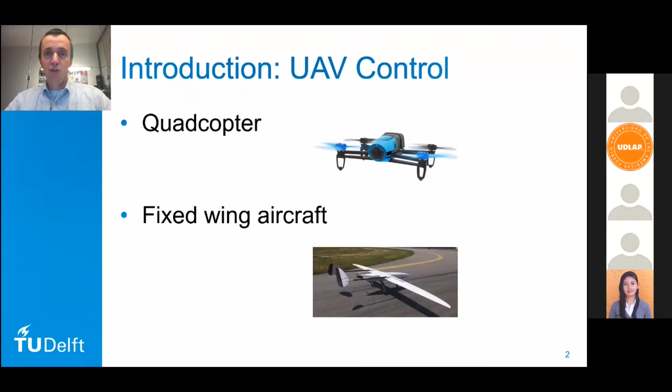For a long time, the research on flight control of UAV was focused on quadcopters because they are simple, cheap, and versatile. They have only 4 moving parts and therefore are a great study object. And fixed-wing aircraft because they have a very good endurance. They have a very good lift-to-drag ratio, can stay in the air with little energy and thereby achieve very long ranges and very high speeds.

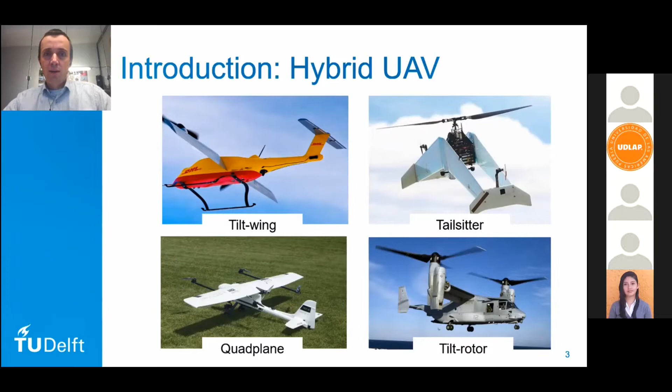But recently, in the last decade, a lot of attention was given to so-called hybrid UAV. One of those hybrid aircraft is the NederDrone. The NederDrone was developed in Delft to be a versatile vertical takeoff and long endurance hydrogen-powered aircraft. The fuselage is shaped around a pressure cylinder with hydrogen, and in the back we have a fuel cell. It has very high aspect ratio wings for minimal drag and long endurance. And thanks to its 12 motors spread over the long wing, we have hover capabilities.

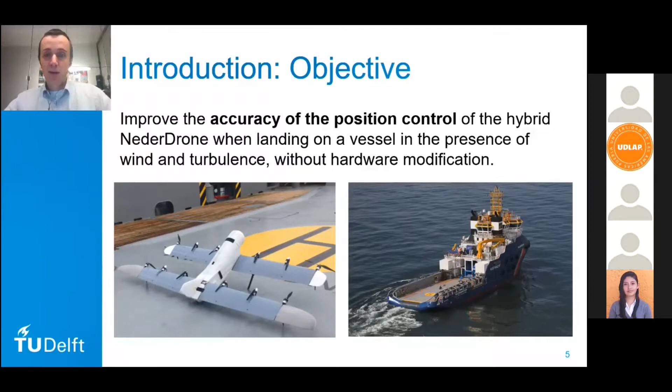So the objective of this study is to improve the accuracy of the position control of the hybrid NederDrone for the mission of landing on, for instance, a moving vessel. And that moving vessel is typically surrounded with wind and turbulence. And one of the objectives of this study is to not need hardware modifications. It then includes running a controller on board the same autopilot with the same microcontroller, which excludes some of the most advanced control theories. The NederDrone is now flying with incremental nonlinear dynamic inversion control.

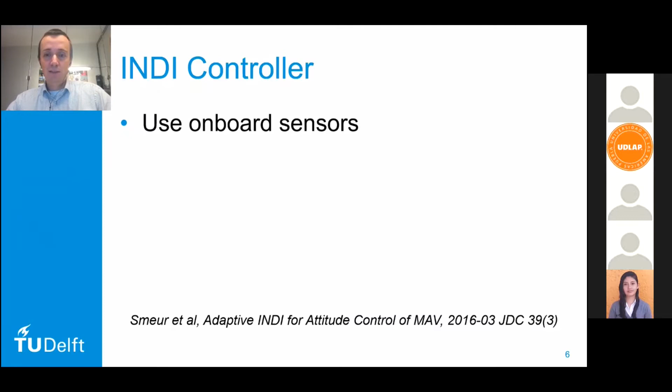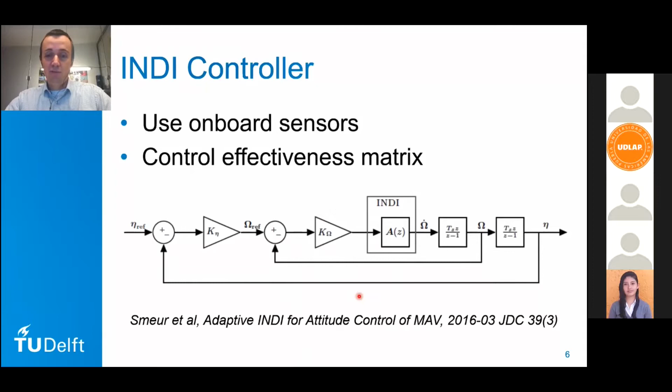The nice property of this type of control is it is sensor-based. You only need a good model of the controls, so a good estimation of the control effectiveness matrix, but you don't need a very accurate aerodynamic model of the whole platform, as the sensors, the accelerometers, are actually measuring the external forces on the platform. The implementation includes a linear model to create reference signals before it enters the INDI control. And the work presented in this paper is about how to create effective reference signals for hybrid UAV.

This feedback system can be done either in Euler angles. It can be done in quaternions. The quaternion is basically one rotation in between 2 coordinate systems, and it's mathematically the shortest rotation. Very interesting. But recently another suggestion came up, which is tilt twist. This one splits the pitch and roll from the yaw, as in most helicopters the thrust vectoring principle is used for position control, and that has a higher priority than setting the yaw.

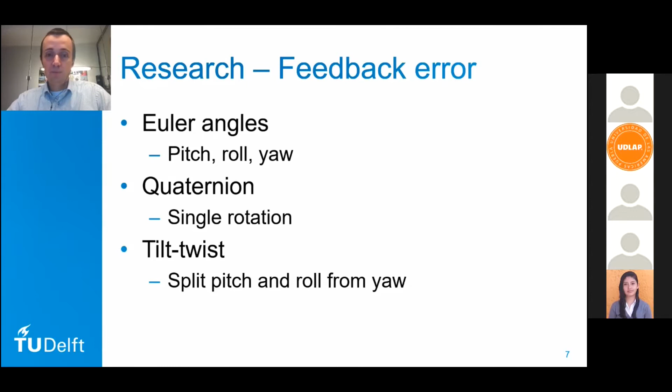If not all three rotations can be executed at the same speed or rate with the same response time, then quaternion control runs into trouble, because the quaternion describes one rotation around one axis, but if the platform can rotate faster around one axis than another, then it doesn't do what you expect, and you end up with perturbations.

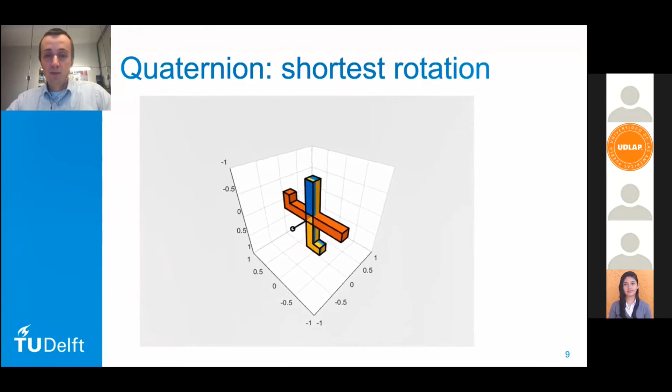In the case of the NederDrone, which has very long wings, the roll is much more controllable than the pitch, which has a much shorter arm, and the yaw, because of the damping of the wings, is by far the hardest to control.

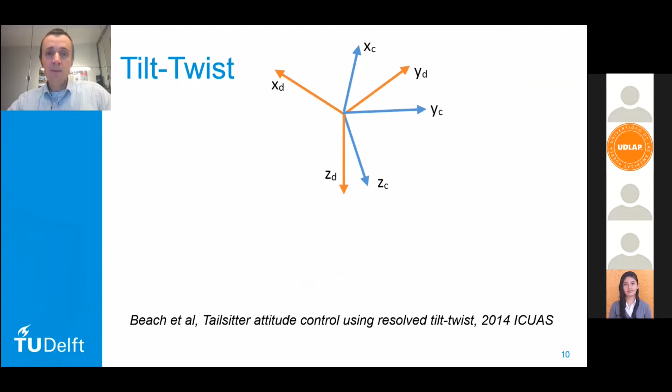Tilt twist starts by finding the shortest rotation to get from the current tilt vector, typically corresponding to the thrust vector, to the desired thrust vector, thereby effectively maximizing the response for the outer loop position control in helicopters. Once the tilt is corrected as quickly as possible, then we correct for twist.

This method has been successfully applied on quadrotors, where the tilt is also much faster than the yaw, or twist. Twist is done with torque of propellers and is always slower. The yaw is also less important for the position control.

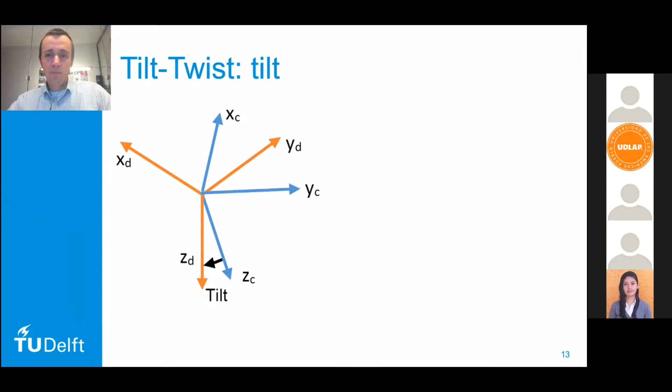How does tilt twist work? If we represent the current attitude with a rotation matrix RC and the desired attitude with a rotation matrix RD, then the matrix multiplication with the inverse yields the error between both. The last column represents a vector of which the arctangents of some elements are the tilt rotation in the X and Y plane.

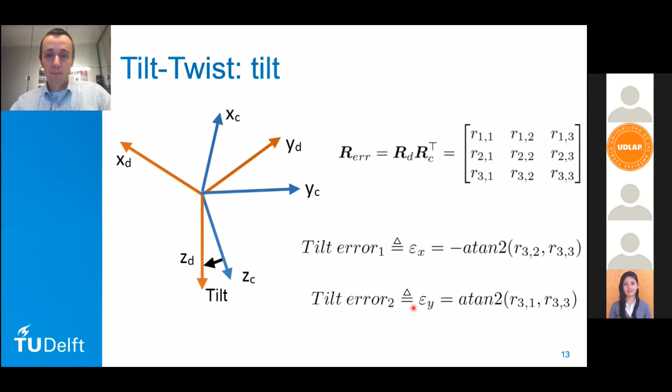For the twist, it's a bit more fiddly. We need to create an intermediate coordinate system called RP, which represents the attitude that the attitude will be after correcting for the tilt error. This is done using the Rodrigues rotation formula, RV, which describes the rotation of a vector along another vector.

And the twist error is then defined as the inverse cosine of the dot product between the two x-axes.

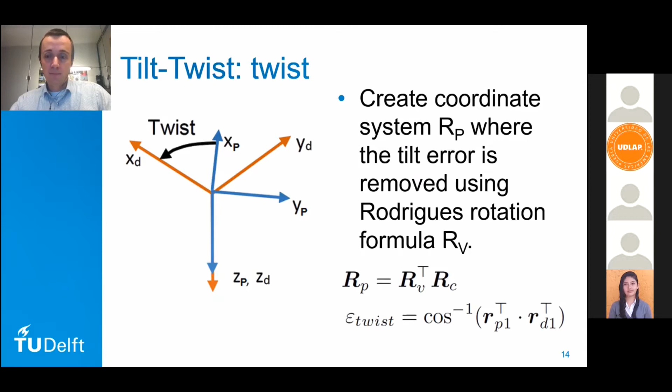What does the difference between quaternion control and tilt-twist control look like on a system with slow yaw dynamics? To investigate that, we created a Simulink model in which the yaw axis was made 10 times slower than the other axis. When you start with a large error, you can see that the pitch and roll angles, in the case of quaternion control, only start to go towards zero when the yaw angle is actually also zero.

For the tilt-twist control, on the other hand, the pitch and roll angles very quickly at 0.6 seconds have reached their set point. This means the tilt vector, or the thrust for a quadcopter, is pointing in the correct direction, and of course, this is used in the outer loop for the position control.

In other words, this simulation shows that with normal quaternion control, as long as your yaw angle is not reaching the desired value, then your pitch and roll are disturbed. And for some platforms, that's particularly important.

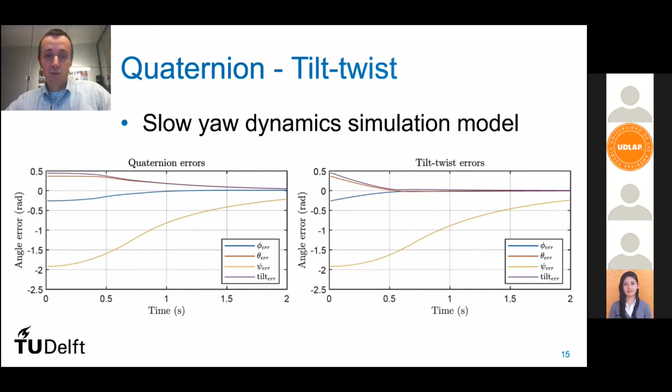For instance, in the NederDrone with very long wings, which can catch wind, this effect shows up very hard. But tilt twist was designed for quadcopters, or all platforms in which the lift vector corresponds with the tilt vector.

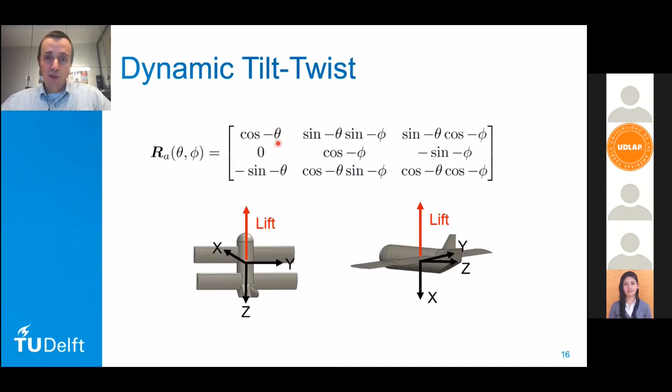To address this, dynamic tilt twist was introduced, which states that not the tilt axis should be performing the shortest rotation, but the lift axis. By introducing a rotation matrix with the transition angle, we can achieve that.

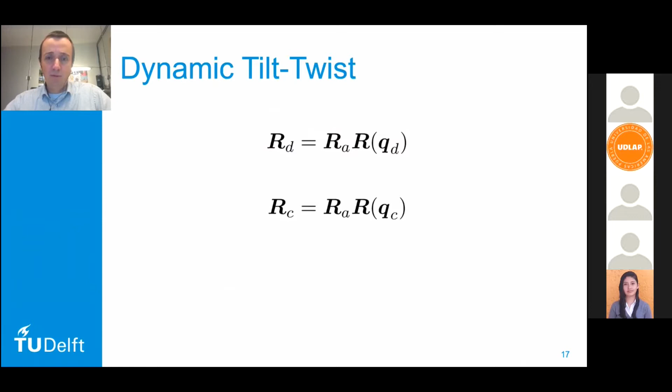The total formula for dynamic tilt twist comprises a simple correction for the transition angle before performing the same tilt twist algorithm as shown before. And the feedback error then needs to be reconverted after having had its lower gain, so that there's time separation between tilt and twist.

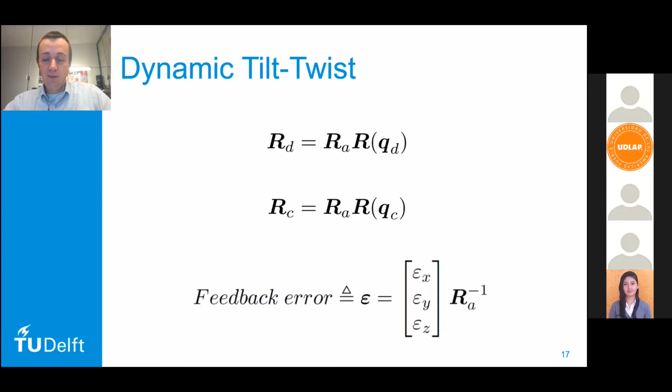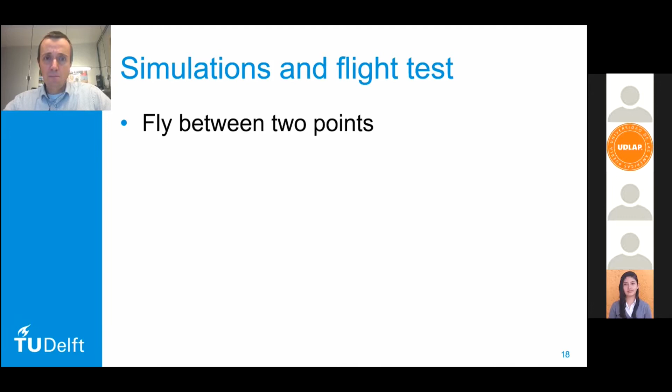To address this, we made a simulator with a more complete model of the drone, the NederDrone, and had it fly between two points back and forth. But during the flight, large jumps in set point were introduced, errors which the drone could never track, errors way beyond its capabilities.

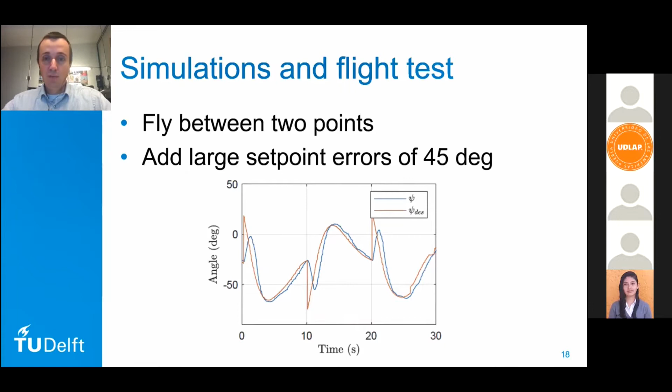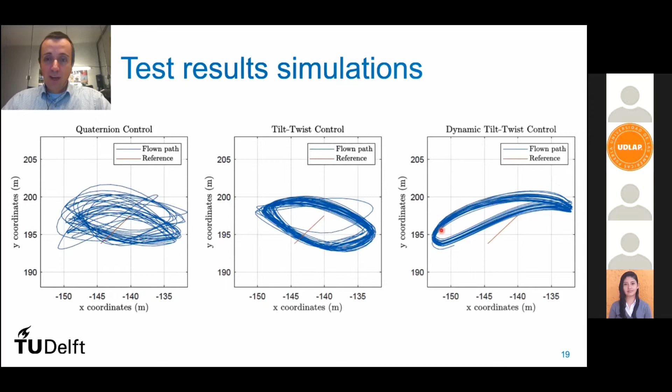The result looks like this. We compared quaternion control in the first plot with normal tilt twist and with dynamic tilt twist, three controllers. The simulation included a model that was not perfectly tuned, but nevertheless you can clearly see that the quaternion control yields much less repetitive patterns, and that the one most aligned with the desired direction is the dynamic tilt twist control. The exact same algorithm was then tested on the real NederDrone.

With tilt twist control, depending on the wind conditions, for instance, if there's no wind, tilt twist control, where the drone will be perfectly vertical and where the lift will be in the direction of the tilt, yields great results. For this test, we awaited much more wind, where you can see that the drone is at about 50 degrees nose down attitude, which already yields quite some couplings. And finally, when we enable the dynamic tilt twist, we see that the drone moves a bit more, so it compensates faster. But the final goal, the desire from the beginning, is to stay more precisely on the line and not put too much importance on the yaw, is perfectly achieved.

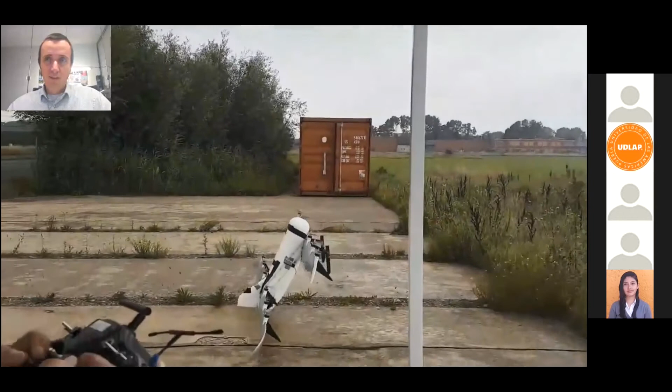The final phase of the flight is a manual landing. So you can see the weather was not so great. It was actually raining. And without wind, we're close to the ground. In the ground effect, the drone is almost nose up.

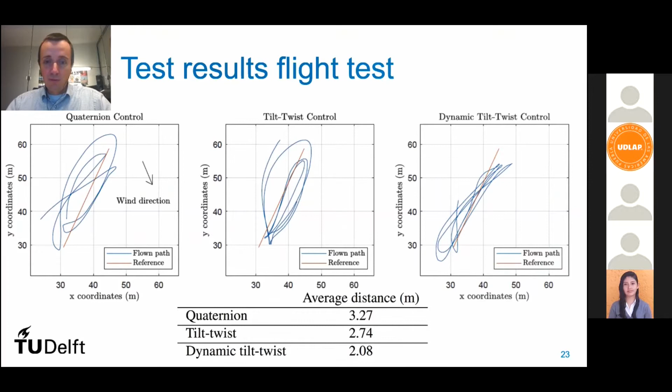Tilt twist control does a lot better, and as I said, without wind, it actually does very well. But the dynamic tilt twist is closest to the desired line in this flight. Expressed in numbers, so the distance between the current instantaneous position and the desired position was an average of 3.27 meters for the Quaternion control, 2.7 for the tilt twist, and 2.08 for the dynamic tilt twist.

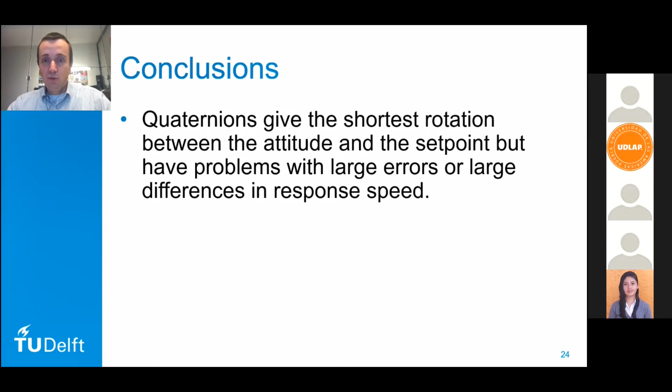Conclusions. Quaternions give the shortest rotation between the attitude and the set point. It's a mathematical formula which ensures there's no shorter rotation. But if you have very large set point errors and you have differences in response speed for the three axes, which is definitely the case for transitioning hybrid UAV, then it does not give the optimal solution, as the thrust vector is not doing the shortest rotation.

Tilt twist, on the other hand, does give the shortest rotation of the tilt vector, but in hybrid and transitioning aircraft, this does not always align with the direction of lift, and thereby it's a great method for quadcopters and helicopters, but has shortcomings in transitioning aircraft, like the NederDrone. The dynamic tilt twist gives the shortest rotation of the lift vector, even on a transitioning UAV.

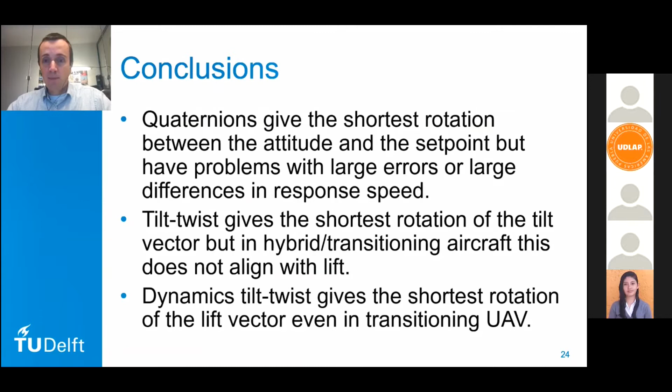To combine this powerful tilt twist ID with a powerful controller as INDI gave very interesting results. To our knowledge, this is the first time that INDI and tilt twist was combined. And the proposed dynamic tilt twist also yields the shortest rotation of the lift vector independent of the transition angle on the platform. And from flight tests, we could see that this helps in reaching the smallest position error. For precision flying and landing, this is the most important metric. Flight tests were performed on the NederDrone and yielded a clear improvement.

This was our presentation of hybrid UAV attitude control using INDI and dynamic tilt twist. Thank you for your attention, and if there are any questions, we'll gladly try to address them.

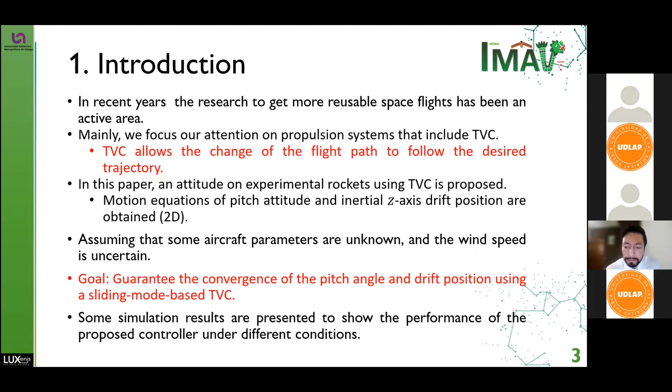The main assumption to carry out this work was that the rocket is considered rigid, without flexibility, constant mass, with approximate aerodynamic coefficients. Considering only a single engine and therefore a single nozzle for control, the geometry of the Earth is considered as the ellipsoid proposed by the World Geodesic System in 1984. The position of the rocket is defined by the Earth Centered Inertial Reference Frame, while the orientation is defined by the reference frame of the body or rocket frame.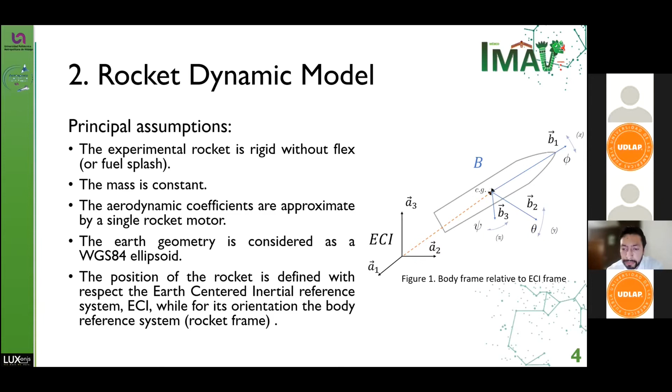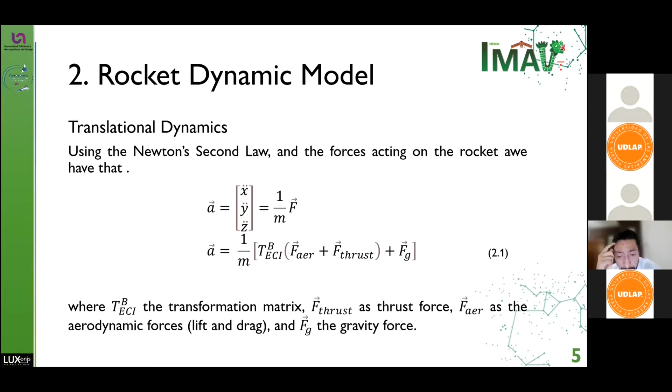Starting with the modeling of the rocket dynamics, it is defined firstly by the translational dynamics to obtain the position of the rocket at each instant of time, which is defined from Newton's second law, where it's necessary to know all the forces acting on the rocket: thrust force, aerodynamic force made of lift and drag, and finally gravity force. Thus, we obtained equation 2.1.

Well, so defining each of these forces, we have the first of them, the thrust force, as we see in equation 2.2, where T represents the total thrust force. As we see in figure 2, taking only the components by means of triangle relationships, we obtain the thrust vector control. In figure 3, we observe the angles delta theta and delta psi that represent the 2 degrees of freedom of movement of our nozzle. Finally, we obtain equation 2.3.

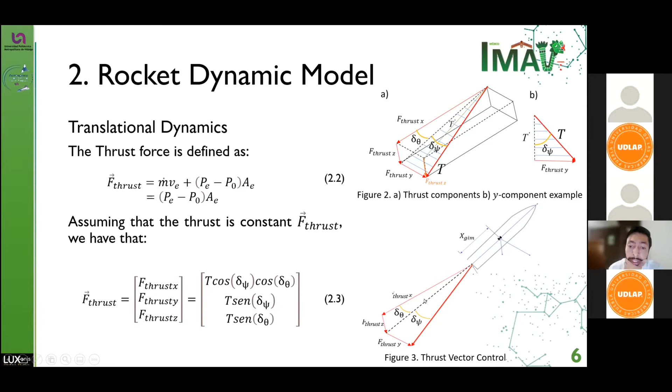Now moving on to aerodynamic forces, we have the lift and drag, where for simple geometries, such as the rocket, we can use the component of the normal force N, as we see in figure 4, and the axial force A. Now changing plane, in figure 5, we can see the third of them, the lateral slip force, which in figure 4 would be normal to the plane. And thus we obtain equation 2.4.

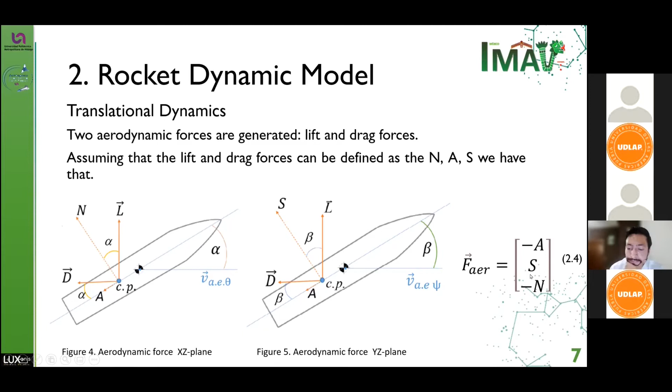Now for more real conditions, we know that the rocket in flight tends to have a small deviation known as track, where the angle formed by it and the actual trajectory is known as drift. So as we see in figure 6, the vector V represents the track, and the angle formed by it and the z-axis is the angle of drift, gamma. So we have this same peculiarity in figure 7.

So defining each of these angles, the angle of attack as alpha and the angle of lateral slip beta. Firstly, we have the orientation angle, the drift angle, and finally the angle of the air disturbances. So redefining the last equation, the equation of the aerodynamic forces by S and N, we obtain equation 2.7.

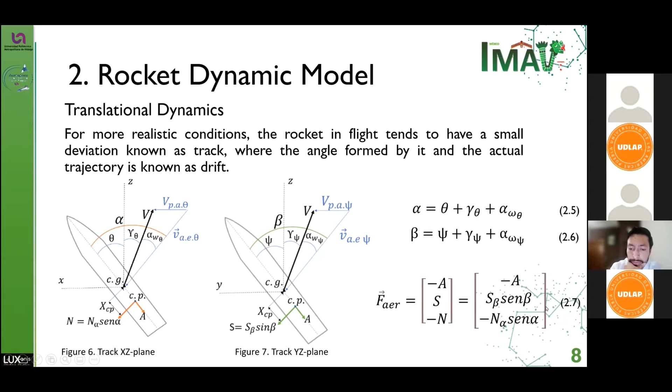Well, now as the last force, we have the force of gravity, whereby using the WGS 84 ellipsoid for a better approximation of the geometry of the Earth, a better approximation of gravity is obtained. It should be noted that this model is in geocentric inertial coordinates, so it is necessary to make a transformation. Thus, we obtain equation 2.8 for the gravity force.

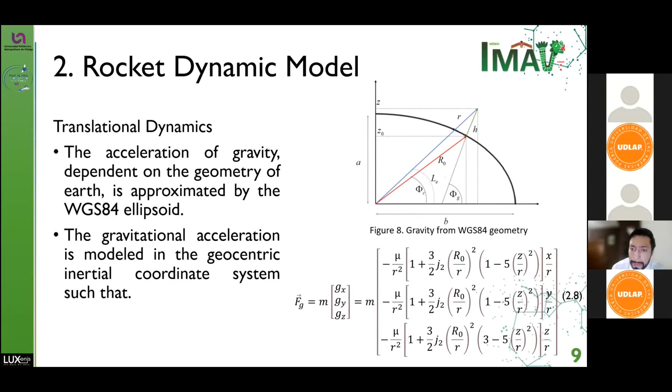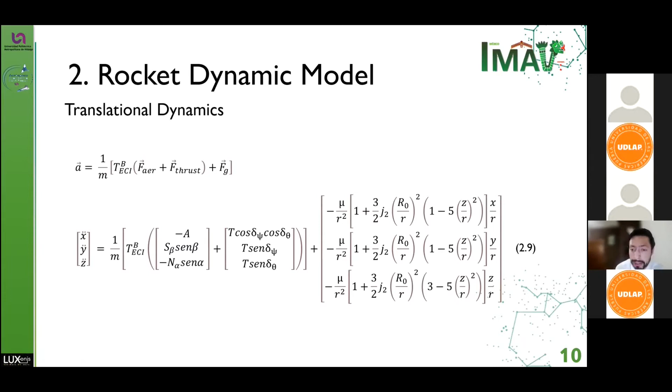Finally, the translational dynamics, considering the aerodynamic force in conjunction with the disturbance, the thrust force defined by the thrust vector control, and finally the force of gravity considering the geometry of the Earth as the ellipsoid WGS 84, we have as a result equation 2.9.

So now to obtain the rotation of the rocket, the rotational kinematics is defined, which are also applied in aircraft. We make use of the Euler angles, yaw, pitch, and roll. Then this rotational kinematics with respect to the reference frame is described as in equation 2.10, which depends on the angular velocity.

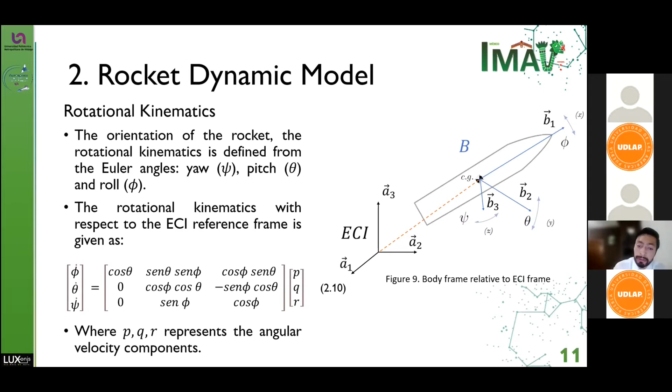Now, to obtain the rotational dynamics, Euler's second law for a rigid solid in rotation tells us that the sum of moments is equal to the derivative of the angular momentum, which in turn is equal to the moment of inertia times the angular velocity. Then we obtain equation 2.11, where it's necessary to define the rocket moments, which are the aerodynamic moment and the thrust moment, as we see in equation 2.12.

The aerodynamic moment is defined by the distance from the center of gravity to the center of pressure times this force, as in equation 2.13. And the moment of thrust is defined by the distance from the center of gravity to the engine gimbal joint, as in equation 2.14. Finally, we define equation 2.15 that describes the principal moments of the rocket, where by substituting this equation, we obtain equation 2.16.

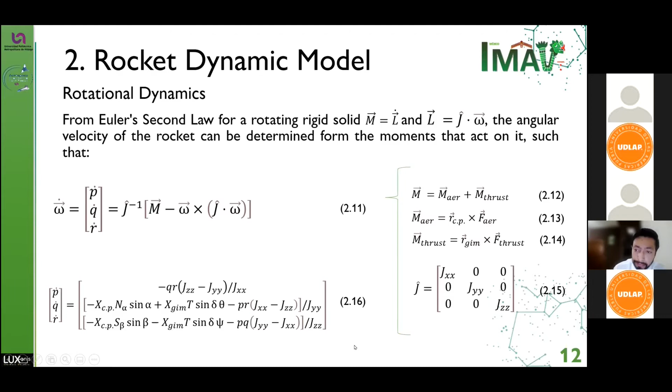Well, as a result, we have that the rocket dynamic model has 9 degrees of freedom according to the design equations needed to define it, with 2 being the maximum order of the system. Finally, the main difference between this model and the others is the consideration of the TVC for a single nozzle and the aerodynamic disturbance.

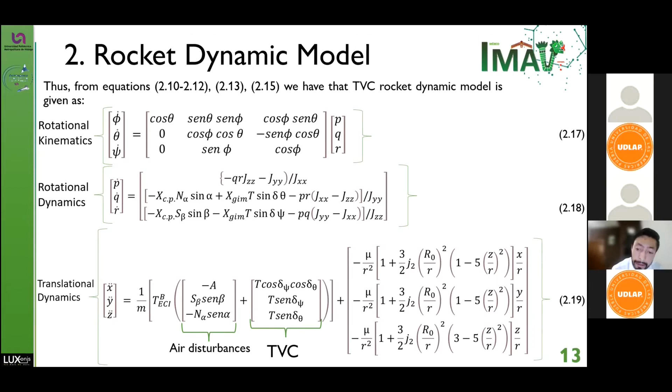Now, starting from the mathematical model developed, assuming that the depth in the y-axis doesn't exist and taking only the xz plane and not considering the movement in x, we have that the angles phi and psi are 0, as well as the lateral slip force. In addition, the delta nozzle angles are given by the thrust vector control. Likewise, the zy and xy planes and their combination don't exist.

And finally, considering that the rocket angles and the TVC are small, we say that the cosine of the angle is equal to 1 and the sine of the angle is equal to the angle itself. In this way, we obtain as a result the system with movement in 2D as in equations 3.1 and 3.2.

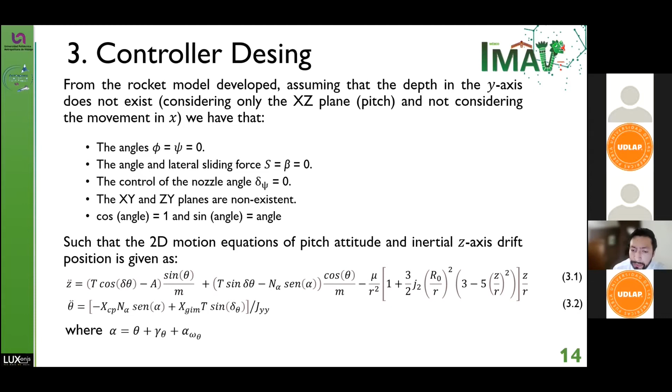Returning to the previous model and writing it as in equation 3.3, where f(x) represents the matrix of the system, g(x) the control vector, x represents the state of the system, where z and z dot represent the height, and theta dot represents the orientation. Finally, the control input is delta theta with respect to the thrust vector control.

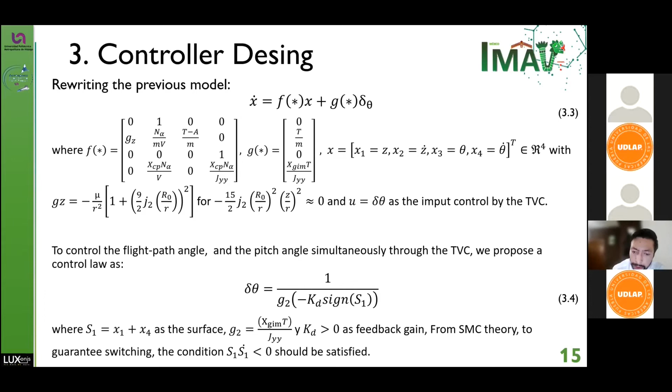The control law is then proposed as defined in equation 3.4, where the surface S1 is defined as x1 plus x4, and G2 and KD as feedback gains. Now, taking the following proposition, considering the law of the previous equation 3.4 to control the flight path, height, and pitch angle in a rocket, then the convergence to the origin is assured in finite time if KD is large enough for any practical conditions.

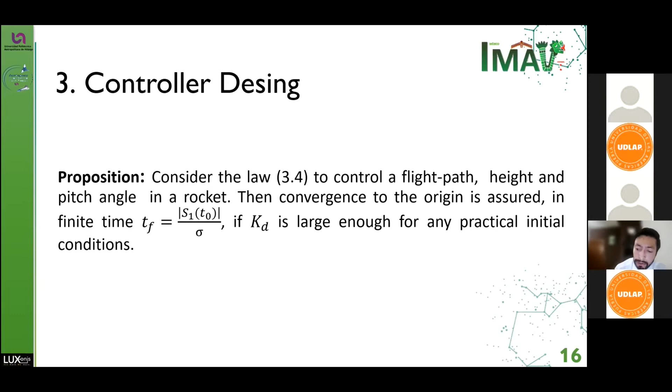Then, by means of a stability proof, we aim to check the condition of the sliding mode, that is, that the surface tends to 0, choosing a sufficiently large gain. This implies that according to the theory of sliding modes, convergence in finite time to the surface S from an initial condition is possible. Then, when S is equal to 0, the trivial solution is that x1 and x4 are equal to 0. That is, z and theta dot tend to 0. This considers physically that the rocket is in an initial condition far from the origin in flight, and we want to land or reach a desired point.

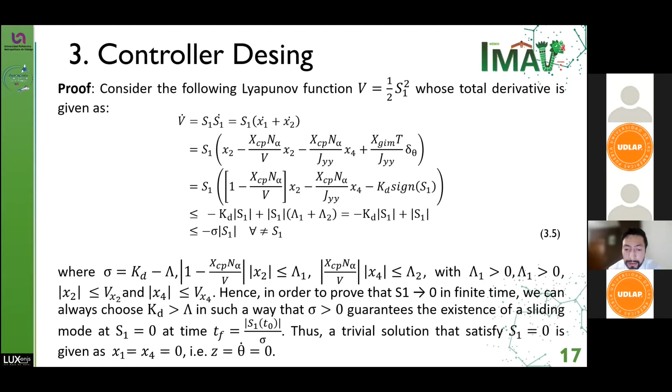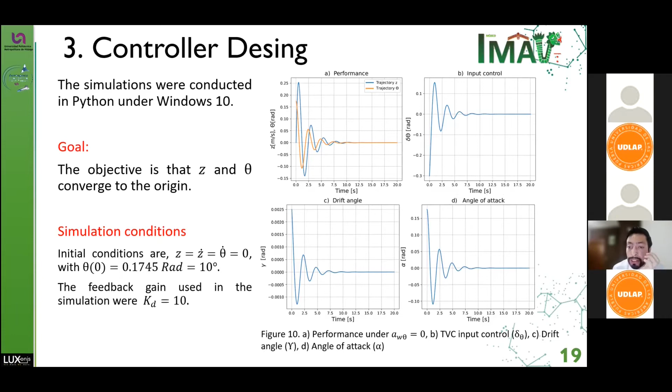Now, starting from this same simulation, adding the aerodynamic disturbance, we have two cases with the intention of checking the robustness of the controller considering their parametric functions. In the first case, the disturbance is considered a sinusoidal function, whose behavior is shown in figure 11a. However, despite this noise, the control is robust enough to bring the rocket to the desired state. In the second case, being more rigorous, we propose the disturbance as a Gaussian function, as we see in figure 12a. It is of higher frequency, and as expected, the controller complies with the desired robustness.

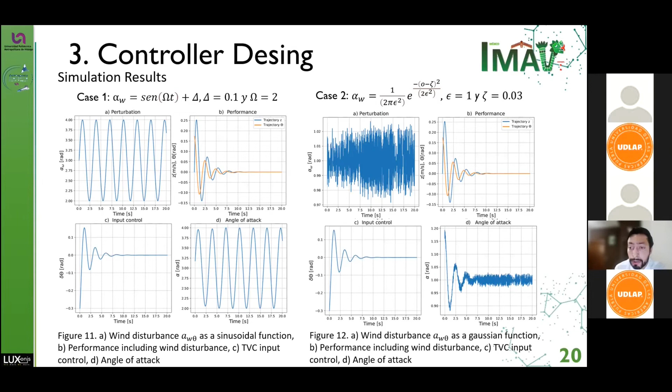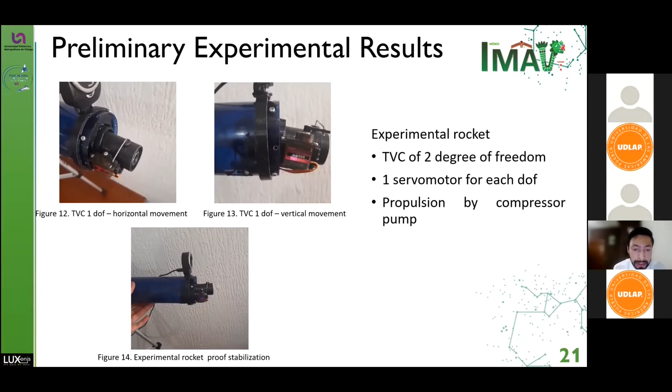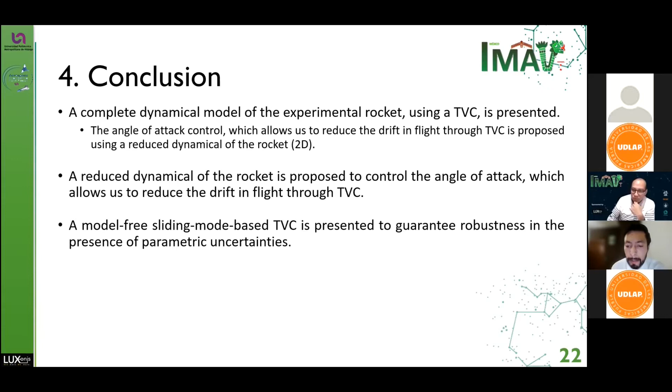So the conclusions of this work are the following. A complete dynamic model of the experimental rocket using a TVC is presented. A reduced 2D dynamic of the rocket is proposed to control the angle of attack, which allows us to reduce the drift in flight through TVC. And finally, a model-free sliding mode-based TVC is presented to guarantee robustness in the presence of parametric uncertainties. So this is the main reference for this work, and thank you for your attention.

Okay. Thank you, Ivan, for this exciting presentation and for this exciting work. I see that there are many theoretical aspects here. We have time for one question. Are there questions from the audience? You can send a question here in the chat if you want. Okay, in the meantime,

Ivan, the classical question is, why did you choose sliding mode control for your work? Can you repeat it again, please? Why did you choose sliding mode control for this work? Why not PD control or another approach? Yeah. Well, we are focusing on the air disturbances. We tried some other controls, like you said, PD or the linear quadratic regulator, but we couldn't control the system. So technically, it's about the response that we obtain. In this particular work, we can control the system only with this backstepping sliding mode controller. So that's the reason.

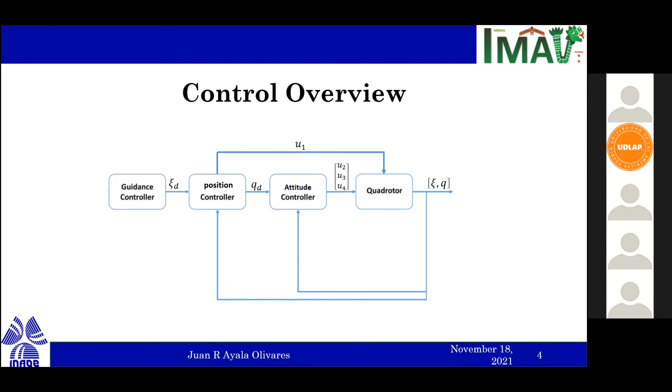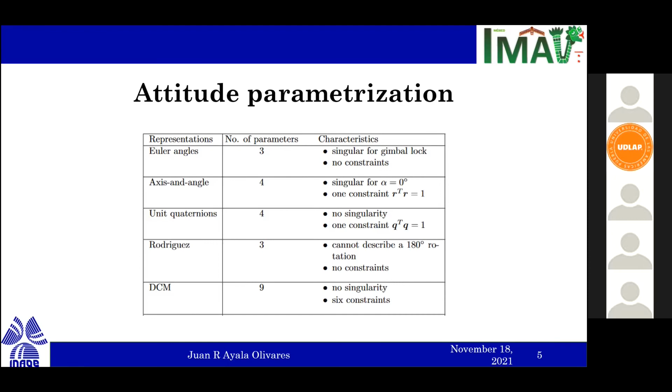For the attitude of a rigid body, there are multiple representations like Euler angles, axis and angle, unit quaternions, Rodrigues parameters, or direction cosine matrices. Unit quaternions have advantages: no singularities and only one constraint. They are also a good option for faster and more accurate calculations. Quaternions are hypercomplex numbers formed of four elements grouped in a scalar and a vector part.

To represent a rotation, a unit quaternion is needed, and it can be transformed to Euler angles using this formula. A quaternion can also be used as a rotation operator using the quaternion product. The logarithm of a quaternion allows representing the rotation in axis-angle form using this transformation, and by the derivative of this result we obtain the angular velocity.

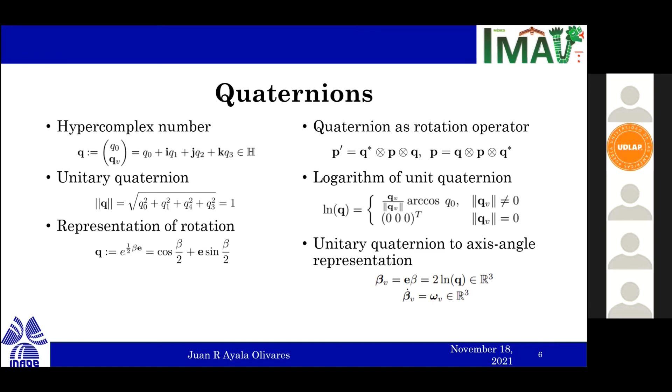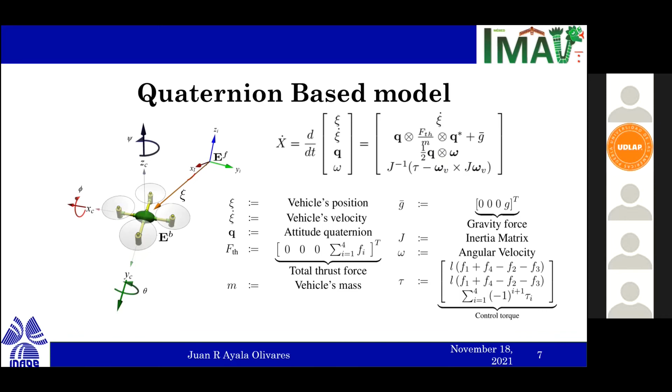The quaternion-based model of the quadrotor is written in this form, where xi is the vehicle position, Q is the attitude quaternion, omega is the angular velocity, J is the inertia matrix, and tau is the control torque. By applying the logarithm mapping, the quaternion model is written in this form, and we can obtain the angular velocity directly from the quaternion.

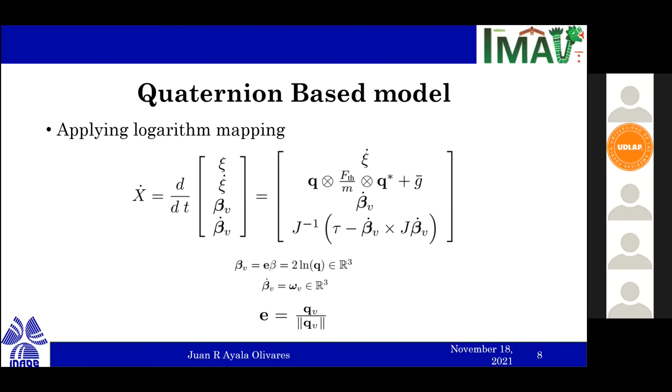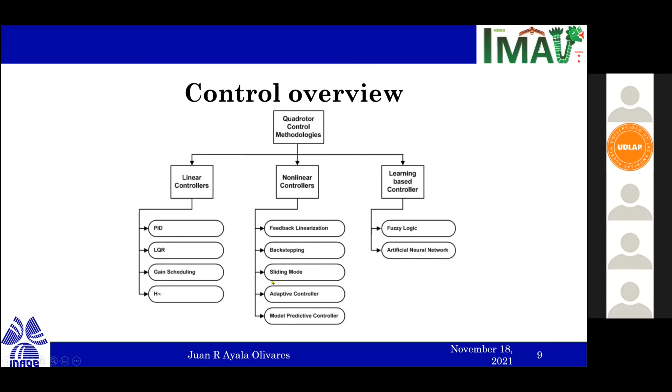In the literature, there are multiple control techniques applied to quadrotors, ranging from linear controllers and nonlinear controllers to learning-based controllers. In our work, we focus on sliding mode control, a technique where the idea is to drive the system state toward a surface called the sliding surface.

Suitably chosen and design a stability controller that gives the system states on such surface. The main advantages of this technique are its fast response and good transient performance. Also, its robustness against a large class of perturbation and uncertainties. And its major disadvantage is the chattering due to high frequency switching, and this can lose energy, excite unmodeled dynamics and even cause actuator destruction.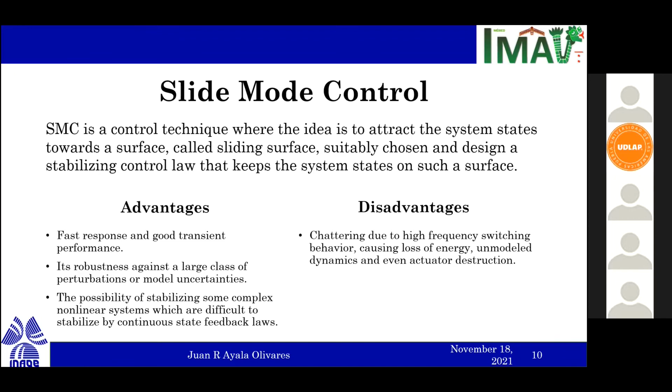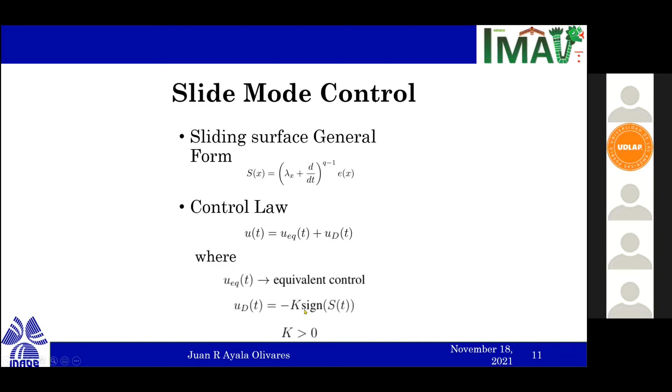The sliding mode control has this general form for the first order, and the control law is formed of two terms. The first one is equivalent to the system, and the second one is nonlinear and depends on the sign of the surface. The objectives of this work are to design a controller based on a sliding mode technique for a quadrotor using a quaternion-based model, and design state observers to improve the rejection of external perturbation and uncertainties in the model.

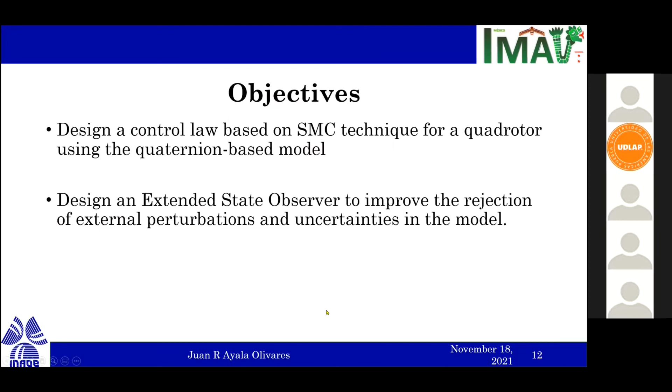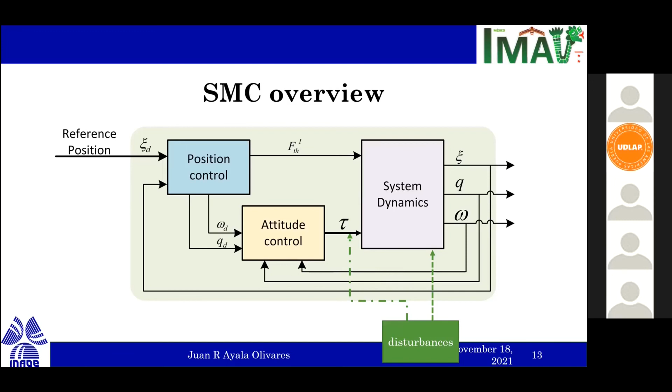The sliding mode control applied to the quadrotor is shown in this block diagram, where first the position control receives the reference position, where the total force is obtained, and the desired angular velocity and desired quaternion are the inputs to the attitude control, where the control torques are obtained, and the outputs of the system are fed back. Also, we apply some disturbances to the input control of the system and the inertia matrix to check the robustness of the control.

The position control is designed from the position subsystem of the model and can be written in this form, so it can be treated like a linear system, and this control law is proposed, where e is the position error, and from the dynamics we can obtain that the constants K1 and K2 must be greater than 0 for the error to converge to 0 as time tends to infinity.

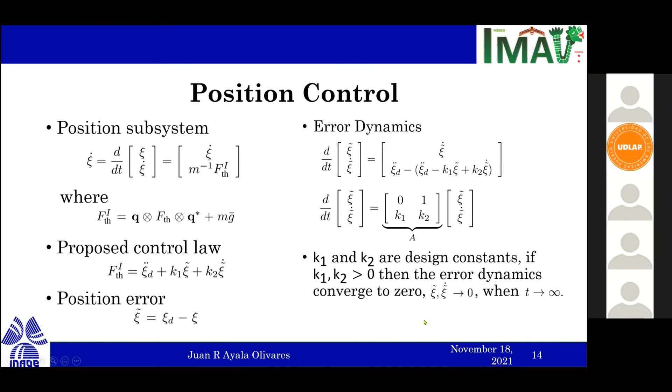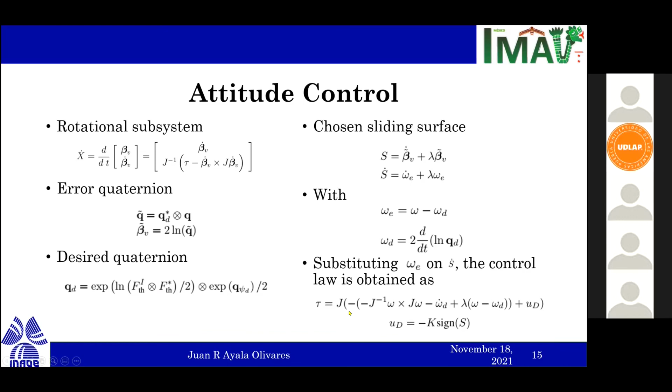The design of the attitude control is from the rotational subsystem using the logarithm mapping, and defining the error quaternion like the difference between the desired quaternion and the quaternion of the system. The desired quaternion is obtained applying some properties from the quaternion product and the logarithm and exponential operation. So, choosing a sliding surface of first order, where omega e is the angular velocity error, from the derivative of the sliding surface we can obtain the control law for the attitude of the quadrotor.

5 minutes, please. Okay.

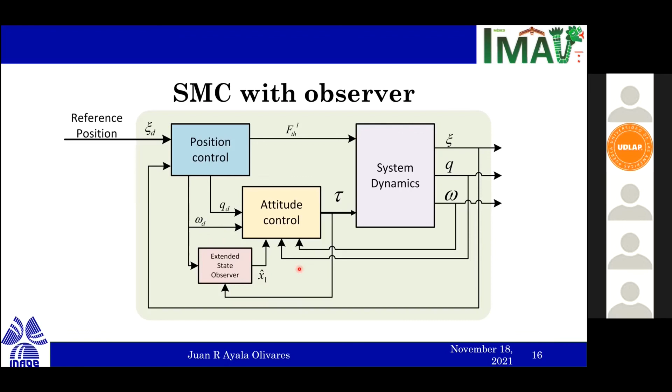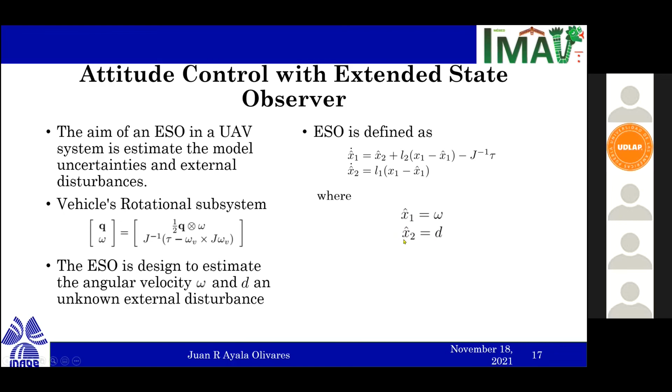For the observer, we choose to apply it to the attitude control to minimize the effects of the perturbation in this way, as shown in this figure. So the aim of the observer is to estimate the angular velocity and the unknown disturbance D. This is because the angular velocity depends directly on the uncertainties in the inertia matrix. So defining the observer in this way, where x1 hat is the angular velocity and x2 hat is the disturbance.

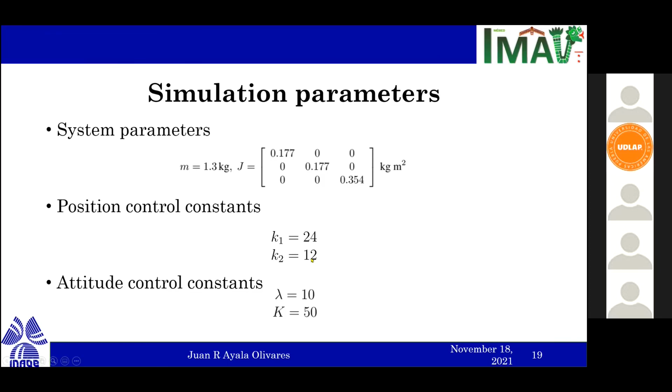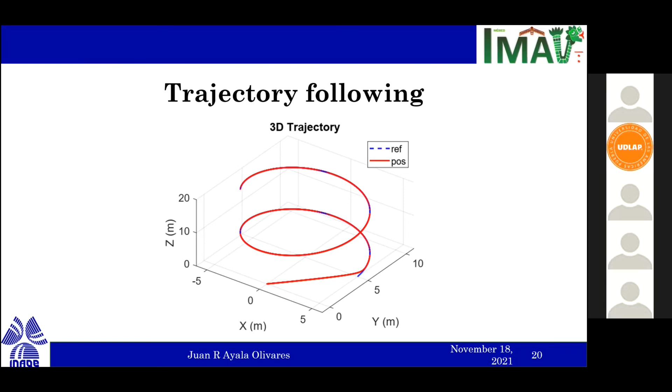I will show you the simulation results in this section. So for the simulation, we choose these parameters and these design control constants. And the trajectory of the quadrotor is an upward spiral, where the quadrotor is following smoothly and with small errors. In the same way, for the attitude control result, we see that after a brief transient of about 3 seconds, the error in the orientation is very low.

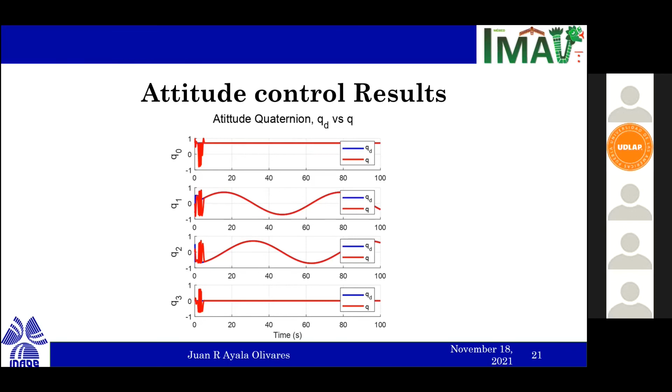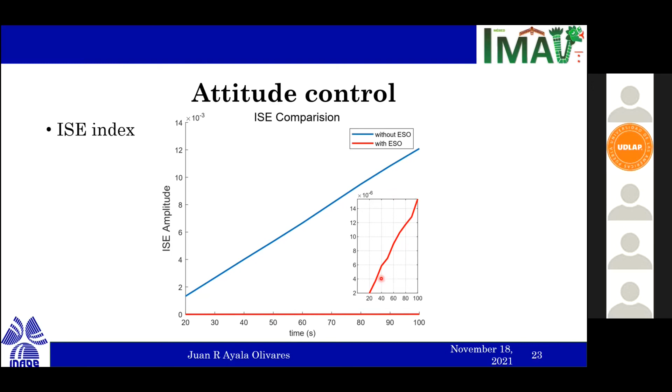So comparing the results from the sliding mode control only and with the observers, we can see that with the observer, the error is smaller, up to 10 times. The disturbances are just uniform noise added to the inertia matrix, about 20% of the nominal value. And the external disturbance is a sine function added to the control torques. So using the ISE index, we can see that the results with the observer are 3 orders of magnitude smaller than without it.

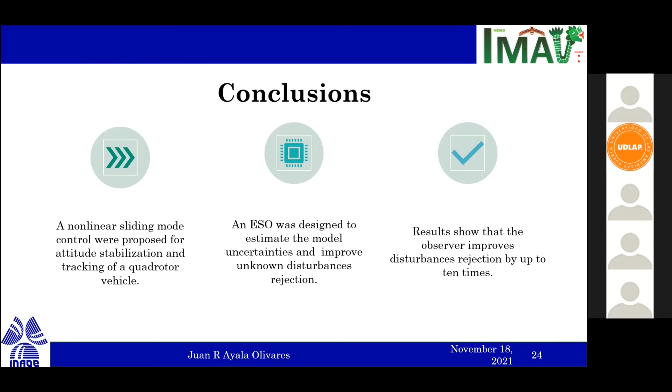Well, for conclusions, we have a nonlinear sliding mode control proposed for the attitude stabilization and tracking of a quadrotor vehicle, and an extended state observer was designed to estimate the model uncertainties and improve the disturbance rejection. Finally, the results show that the observer improves the disturbance rejection up to 10 times. That's all. Thank you.